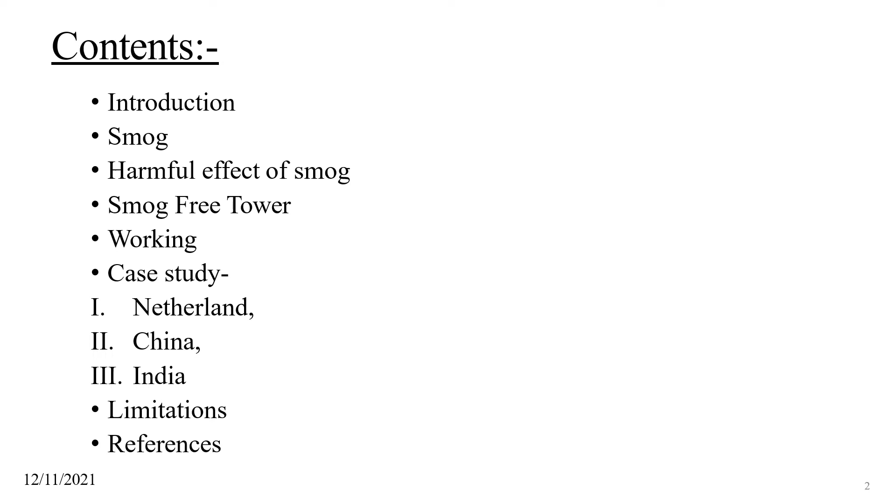Introduction: it is a type of intense air pollution. It is a contraction of the words smoke and fog. Smog is often categorized as being either summer smog or winter smog. Smog is a yellowish, blackish fog formed mainly by a mixture of pollutants.

The atmospheric pollutants or gases that form smog are released in the air when fuels or stubble are burned. Man-made smog is derived from coal combustion emissions, vehicular emissions, industrial emissions, forest and agricultural fires, and photochemical reaction of these emissions.

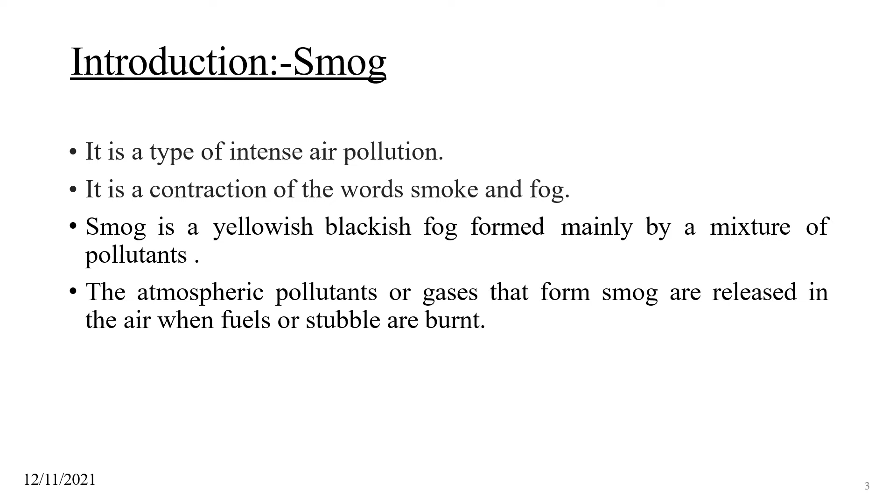Designer Daan Roosegaarde has installed the largest smog-free tower in the world. The first tower was installed in a parking garage in the Netherlands. It cleaned both the inside and outside air of the parking garage with an efficiency of 70%.

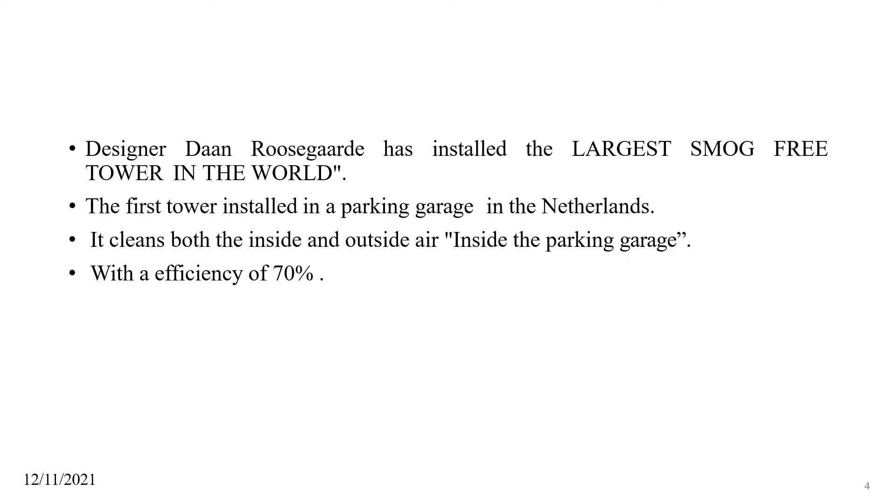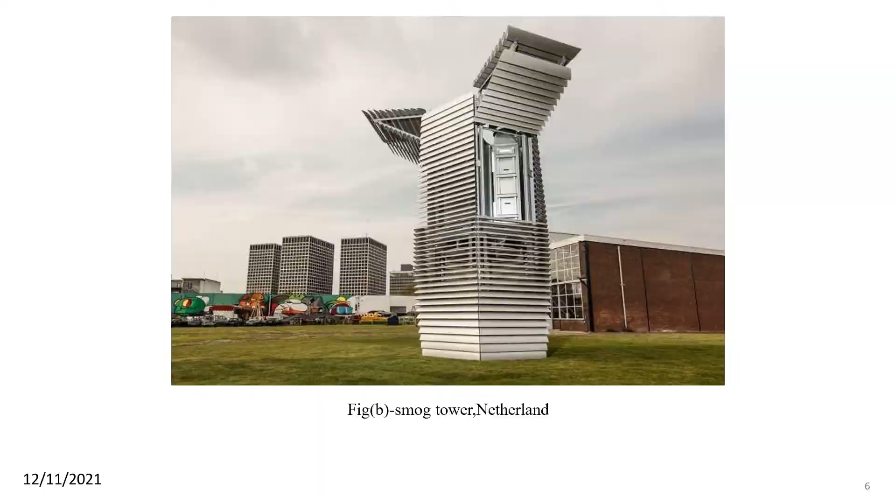Harmful effects of smog: it is harmful to humans, animals, plants and nature. It can cause eye and nose irritation. It dries out the protective membranes of the nose and throat.

The tiny toxic particles can be inhaled into the lungs, leading to asthma, severe respiratory disease, and even death in some cases.

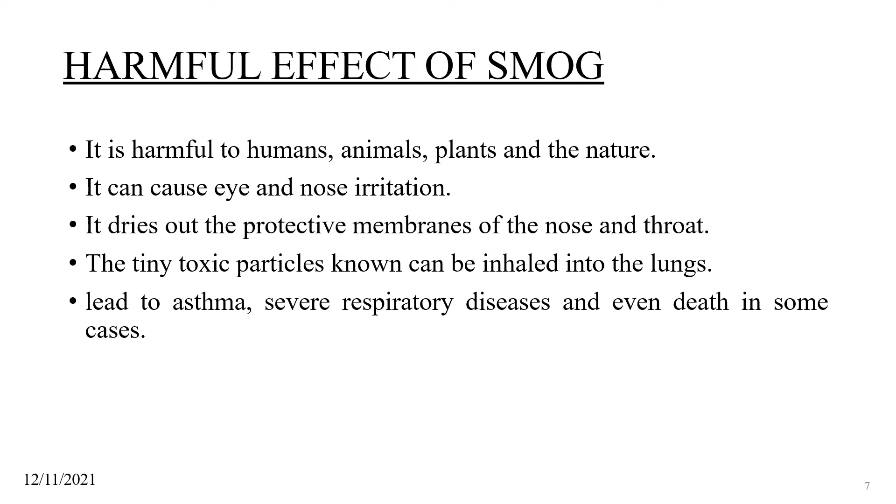Various health impacts due to smog: by PM10 - lung damage, cancers, high blood pressure and reduced lung development. By PM2.5 - eye irritation, asthma, stroke, reduced lung development and cancer. By oxide of sulfur - chest pain, airway infection, asthma. By oxide of nitrogen - lung damage, eye irritation, asthma.

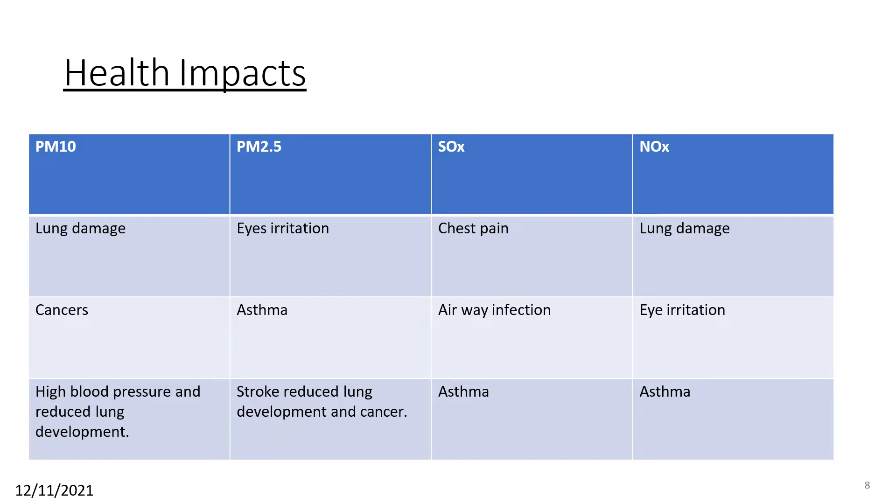What is a smog-free tower? Smog towers are structures designed as large-scale air purifiers to reduce air pollution. It uses energy-friendly and patented ionization technology with lightweight construction.

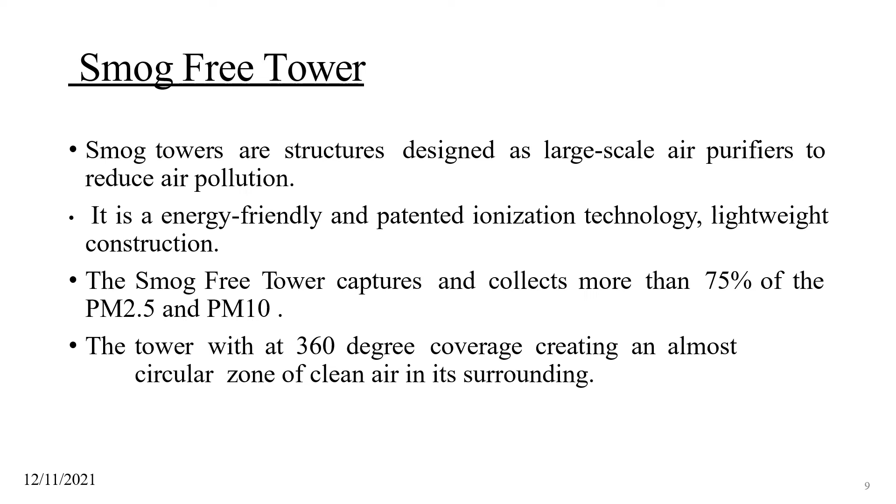The smog-free tower captures and collects more than 75% of PM2.5 and PM10. The tower provides 360-degree coverage, creating an almost circular zone of clean air in its surroundings. This is a picture of a smog-free tower.

Working of a smog tower: the basic principle of a smog-free tower is ion technology. The tower sucks in dirty air like a giant vacuum cleaner.

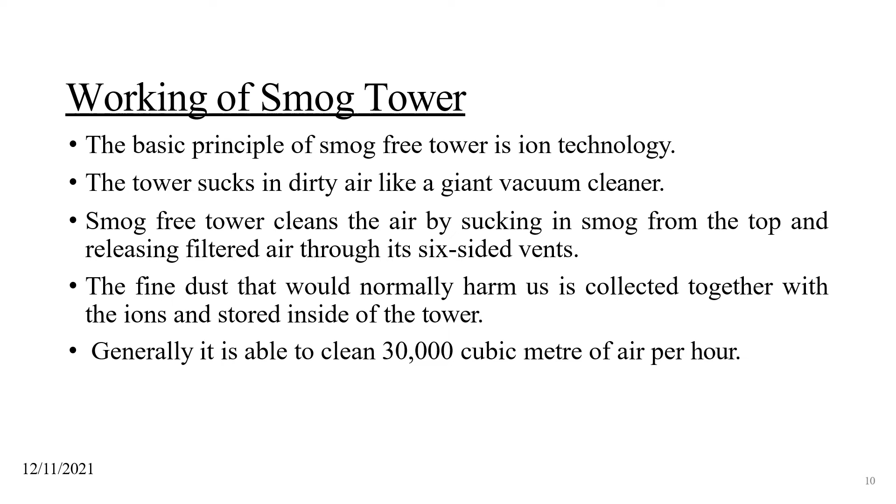A smog-free tower cleans the air by sucking in smog from the top and releasing filtered air through its six side vents. The fine dust that would normally harm us is collected together with the ions and stored inside the tower. Generally, it is able to clean 30,000 cubic meters of air per hour.

This is a picture of the working of a smog-free tower. From the top of the tower, it sucks polluted air from the atmosphere with the help of fans, which are mounted at the bottom of the tower.

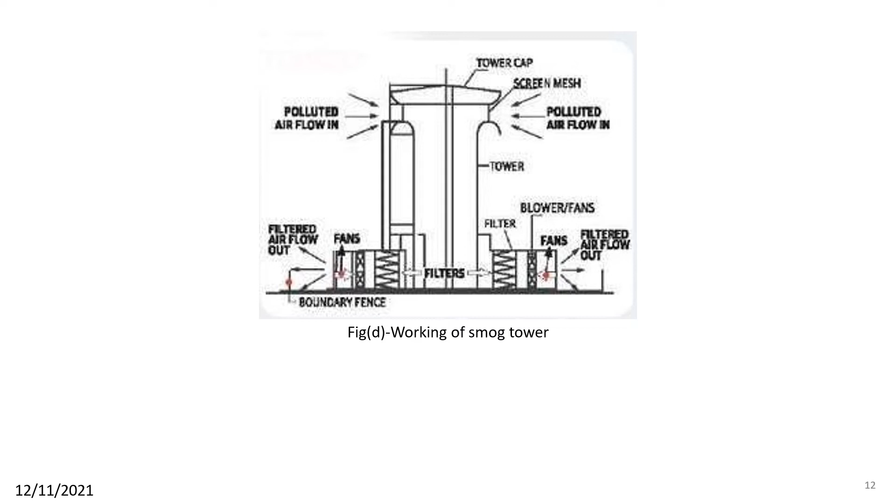Then this polluted air goes to a filter where it gets cleaned, and clean air is released from the bottom of the tower. It is a continuous process.

Case study 1: A Smog Tower of Netherland. The Dutch city of Rotterdam has opened the world's first smog-free tower. The 7-meter high tower sucks in dirty air like a giant vacuum cleaner.

Ion technology then filters it. Daan Roosegaarde says it is not a Louis Vuitton bag or a Ferrari, but clean air and clean energy.

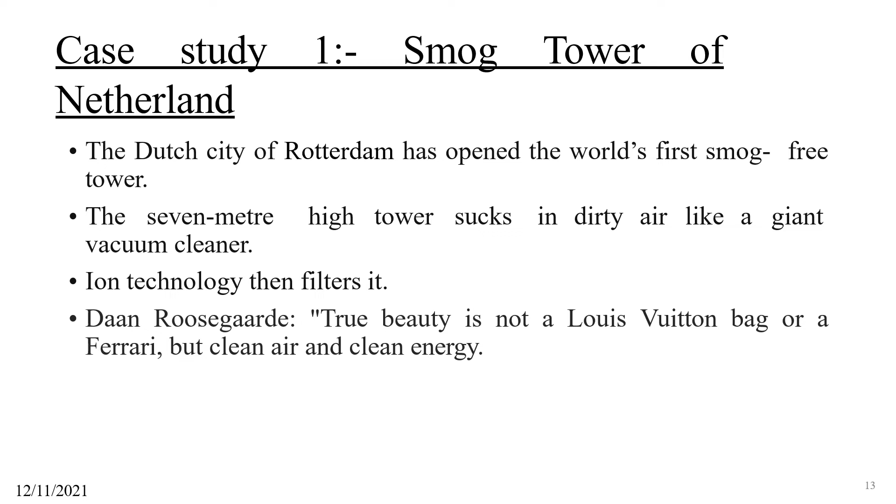Roosegaarde designed the smog-free ring from compressed smog particles. By sharing a smog-free ring, it donates 1000 cubic meters of clean air to the city.

Specifications: the smog-free tower is a 7-meter tall aluminium tower using only 1170 watts of green electricity and positive ionization technology. It purifies the particles of contamination through a process called photocatalysis, using sun and wind, and provides clean air for 104 people each day.

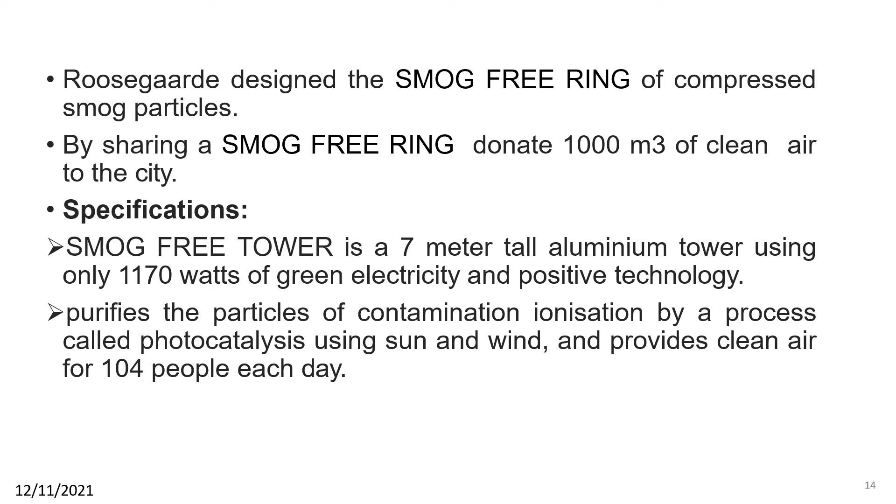This is the picture of a smog tower of Rotterdam.

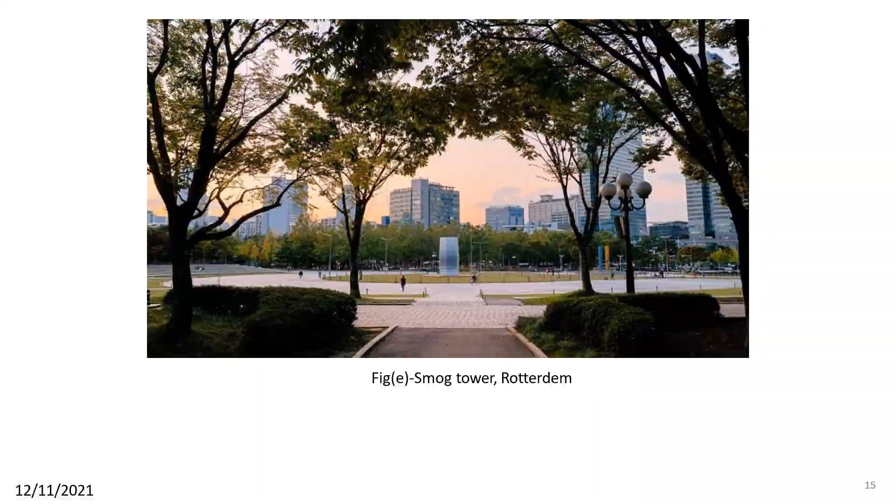Case study 2: A smog tower of Beijing, China. The world's largest air purifier is in the northern city of Xi'an. In 2018, a 100-meter, 330-foot tower was built.

It is under testing by researchers at the Institute of Earth Environment. The tower works through greenhouse covering: polluted air is sucked in, heated up by solar energy, and then circulated through multiple layers of cleaning filters.

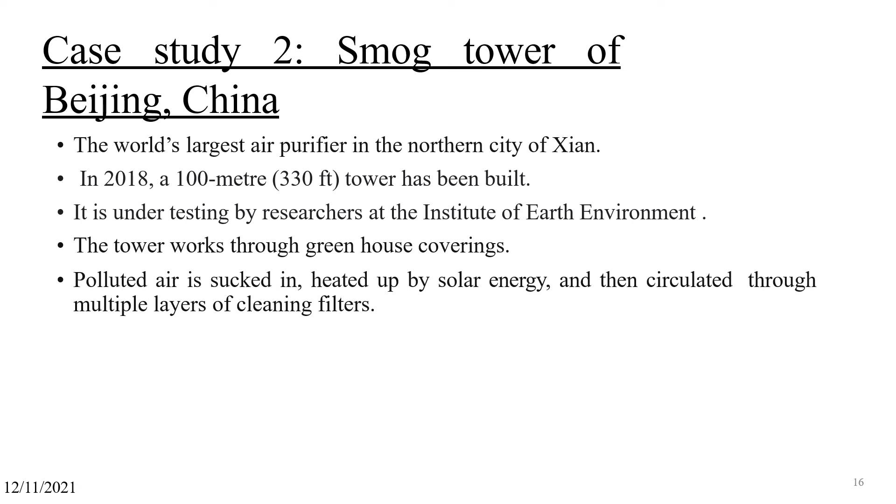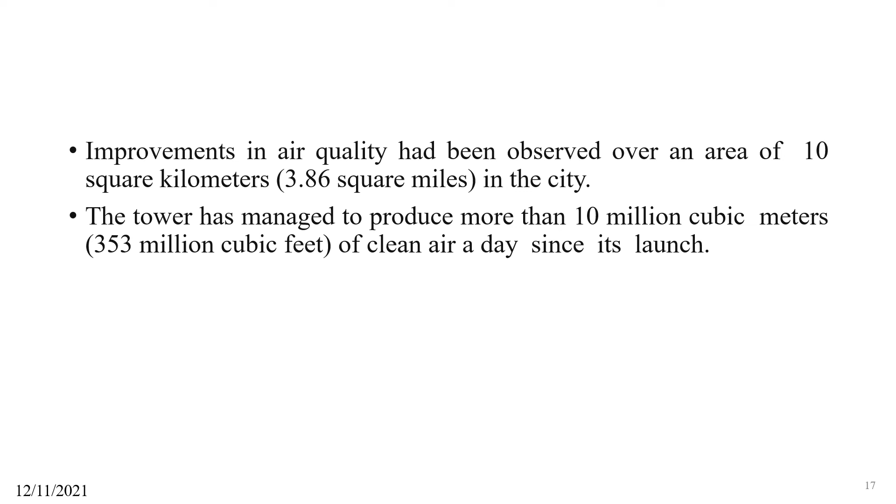Improvements in air quality have been observed over an area of 10 square kilometers, or 3.86 square miles, in the city. The tower has managed to produce more than 10 million cubic meters, or 353 million cubic feet, of clean air a day since its launch.

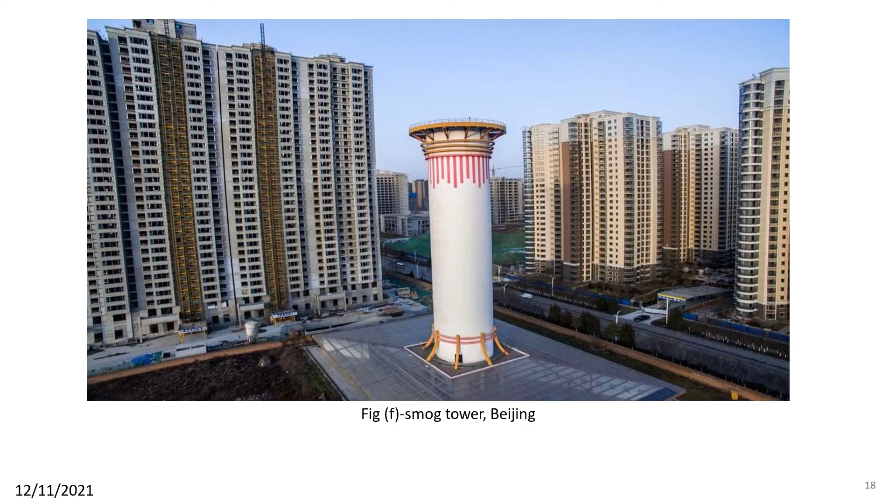Case study 3: A Smog Tower of India. India's first smog tower is in Delhi, Connaught Place. The height of the tower is 24.2 meters.

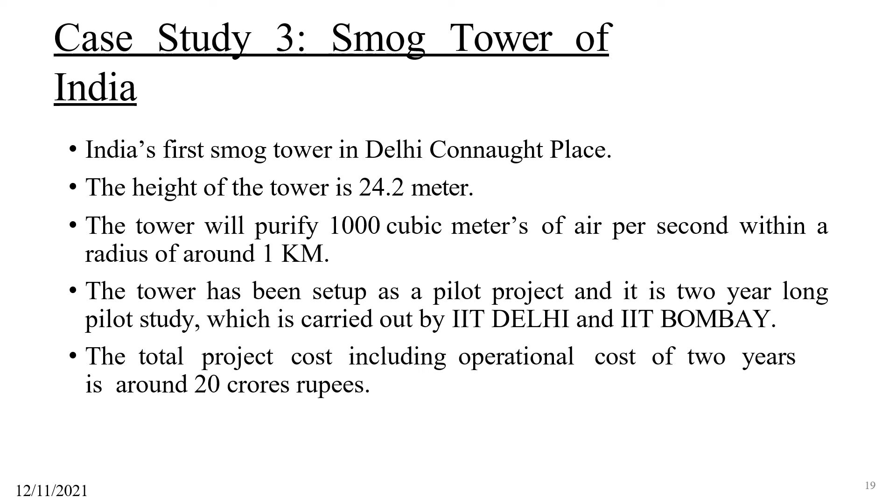The tower will purify 1000 cubic meters of air per second within a radius of around 1 kilometer. The tower has been set up as a pilot project and it is a 2-year long pilot study carried out by IIT Delhi and IIT Bombay. The total project cost, including operational cost of 2 years, is around 20 crore rupees.

Smog towers work on the principle of HEPA filtration or air ionization technology. High Efficiency Particulate Air filters, known as HEPA filters, are able to remove 99.97% of dust particles that are 0.3 microns in diameter, according to the Environmental Protection Agency.

A total of 40 fans have been installed at the bottom of the tower, and there are also 5000 filters installed in it. Delhi was the most polluted capital city in the 2020 World Air Quality Report by a Swiss organization.

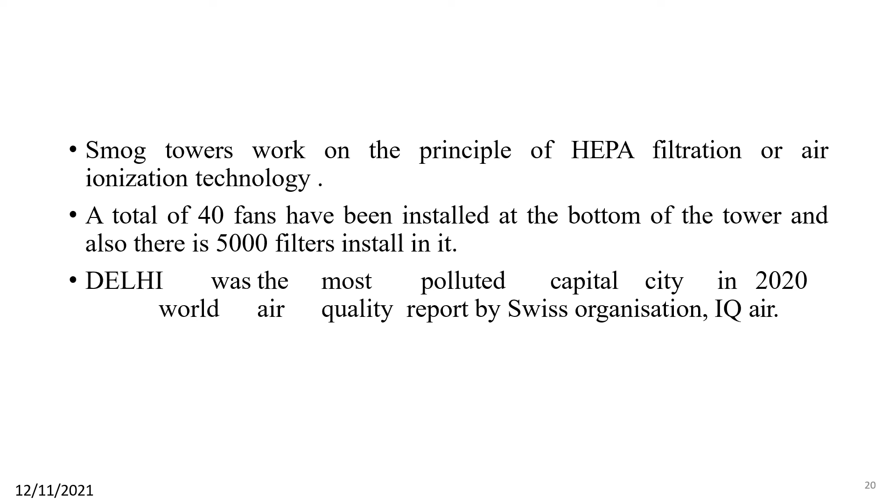Various sources of air pollutants in Delhi: pollutants PM10, PM2.5, oxide of sulfur, and oxide of nitrogen come from various sources as shown here.

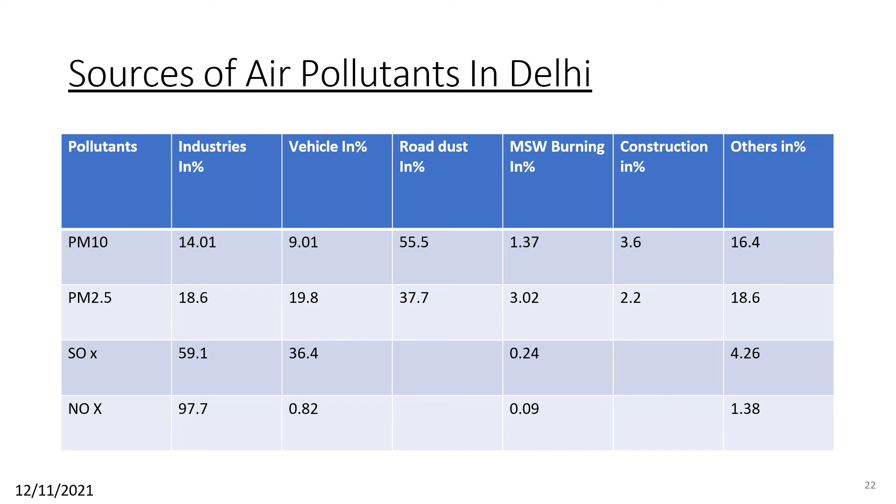Limitations of a smog tower: initial cost is high. It would require large funding to make towers in mass production.

The tower cannot be a permanent solution as it covers only a small surrounding area, so a large number of such towers are required to carry out the work on a large scale.